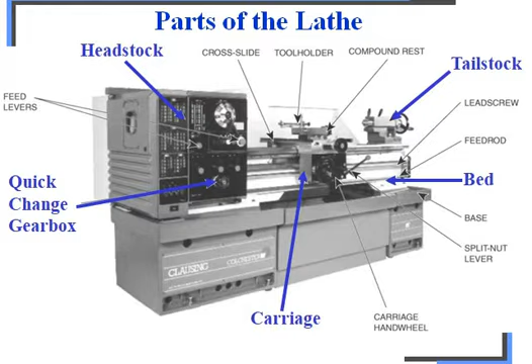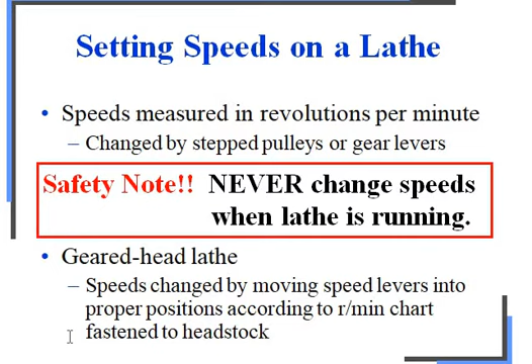Setting speeds on the lathe: speeds measured in revolutions per minute, changed by stepped pulleys or gear wheels, the gear levers. Very important safety note: never change the speeds when the lathe is running. On a geared head lathe, speeds are changed by moving speed levers into proper positions according to the RPM chart fixed to the headstock.

Next, shear pins and slip clutches, which prevent damage to the feed mechanism from overload or sudden torque. Shear pins are made of brass, found on the feed rod, lead screw, and end gear train. Spring-loaded slip clutches are found only on feed rods. When the feed mechanism is overloaded, the shear pin will break or the slip clutch will slip, causing the feed to stop.

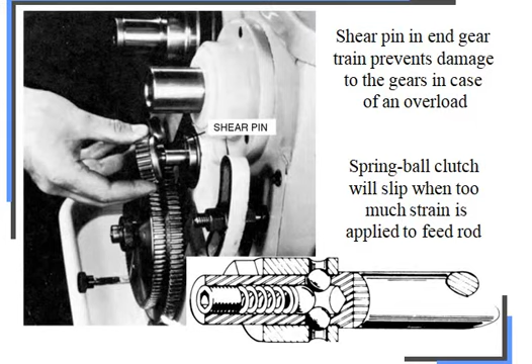Next we'll discuss lathe accessories. These are divided into two categories: work holding, supporting and driving devices. This includes lathe centers, chucks, face plates, mandrels, steady and follower rests, lathe dogs, drive plates, cutting tool holding devices, straight and offset tool holders, threading tool holders, boring bars, and turret type tool post.

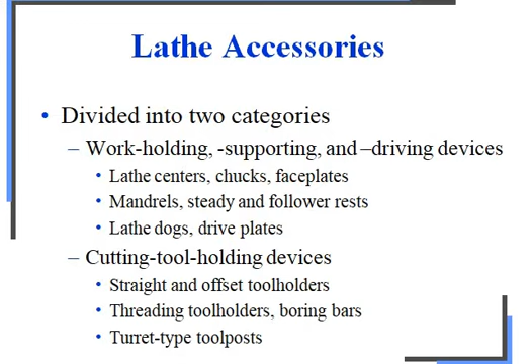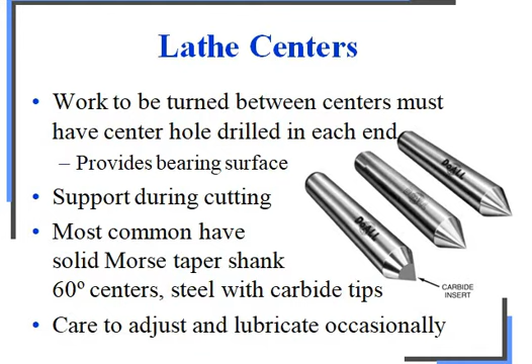Centers support the work during cutting; most common have a solid Morse tapered shank, 60 degree centers, steel with carbide tips. Care is needed to adjust and lubricate occasionally. I will show you in the next slide where we hold these centers.

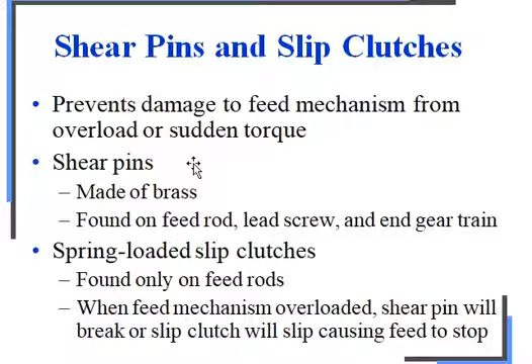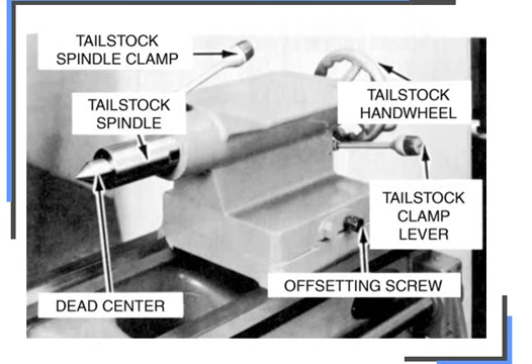Next we'll discuss chucks, used extensively for holding work for machining operations, work that is large or of unusual shape. The most commonly used lathe chucks are 3-jaw universal, 4-jaw independent, and collet chuck.

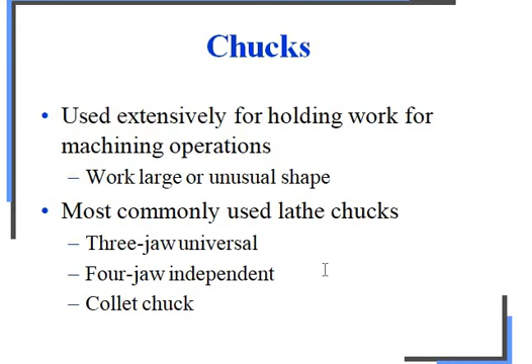First we'll discuss the 3-jaw universal chuck. You can see in this figure the 3 jaws shown. It holds round and hexagonal work, grabs work quickly and accurately within a few thousandths per inch. The 3 jaws move simultaneously when adjusted by the chuck wrench, caused by a scroll plate into which all 3 jaws fit. There are 2 sets of jaws: outside chucking and inside chucking.

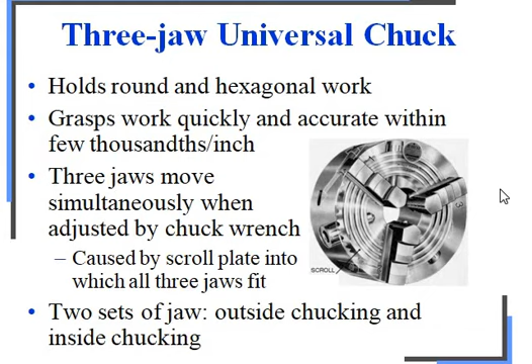Next we'll discuss the 4-jaw independent chuck, used to hold round, square, hexagonal and irregularly shaped workpieces. It has 4 jaws, each adjusted independently by chuck wrench. Jaws can be reversed to hold work by inside diameter.

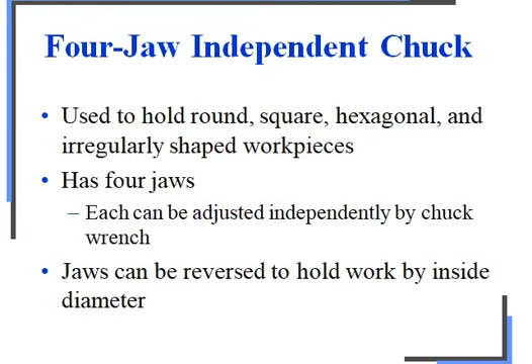Next you can see the headstock spindles shown in the figure, with the chuck adapter and square shoulder. Universal and independent chucks are fitted to 3 types of headstock spindle: threaded spindle nose, which screws on in clockwise direction, and tapered spindle nose, held by a lock nut that tightens on the chuck.

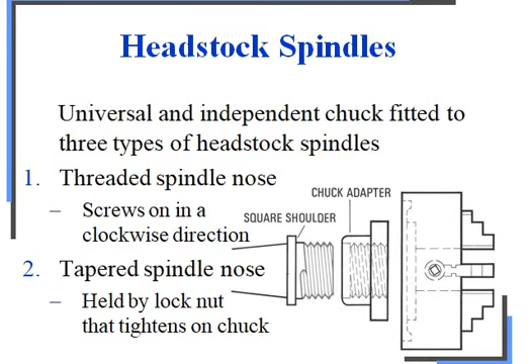Here you can see the headstock spindles. Cam lock spindle nose held by tightening cam locks using a T-wrench. The chuck is aligned by a tap on the spindle nose. You can see the chuck on the faceplate with cam locks shown in the figure.

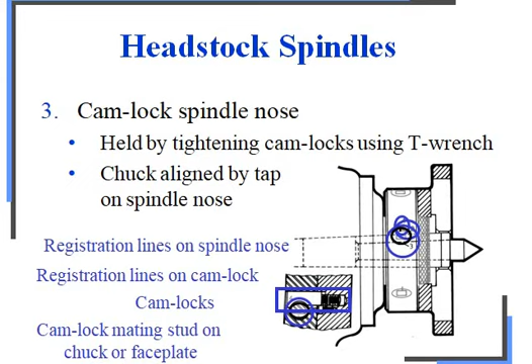Next we'll discuss the collet chuck. Why do we use a collet chuck? Because it is the most accurate chuck, used for high precision work. Spring collets are available to hold round, square or hexagon shaped workpieces. Each collet has a range of only a few thousandths of an inch over or under size, stamped on the collet.

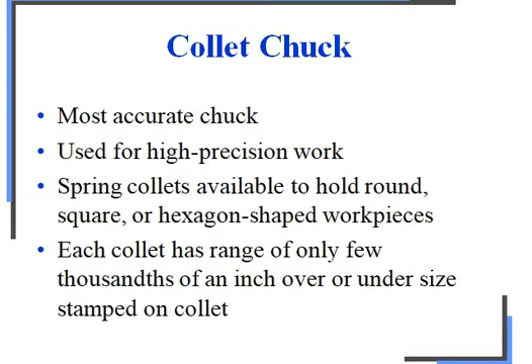This is the collet chuck, shown in the figure. This is the drawbar, the collet sleeve, and this is the collet - the hollow is the collet. The spindle nose cap, hand wheel, and special adapter are fitted into the taper of the headstock spindle, with a hollow draw bar having internal thread, inserted in the opposite end of the headstock spindle. It draws the collet into the tapered adapter, causing the collet to tighten on the workpiece.

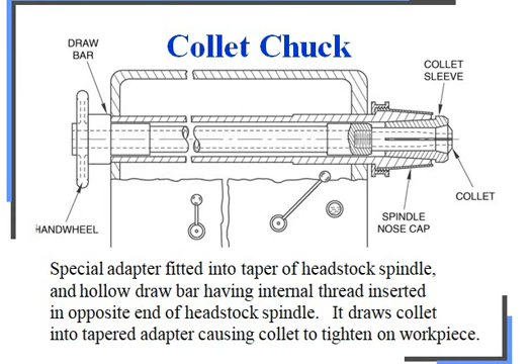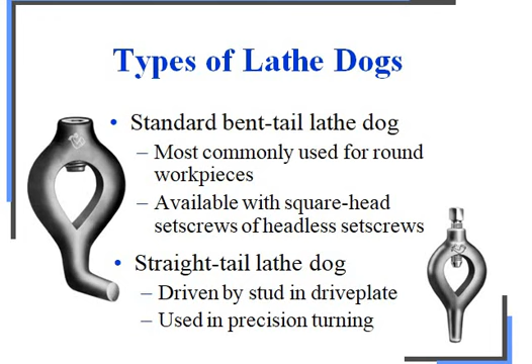Types of lathe dogs: the standard bent tail lathe dog, most commonly used for round workpieces, as shown in the figure. Available with square head set screws or headless set screws. The straight tail lathe dog is driven by a stud in the drive plate, used in precision turning. These are the types of lathe dogs.